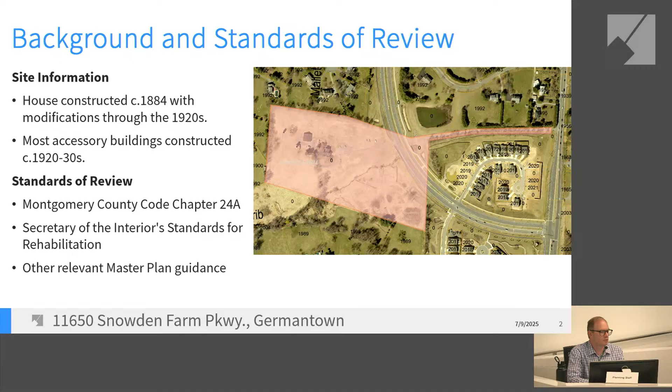Moving on, we will move on to the preliminaries, and our first preliminary tonight is 2A at 11650 Snowden Farm Parkway, Germantown. Is there a staff report? Yes, there is, Madam Chair. This is actually a second preliminary consultation for work to the project. Again, this is the House Farm master plan site. The house was constructed circa 1884 with modifications through the 20s. Most of the agricultural accessory buildings were built between the 20s and the 30s. And we're dealing with the barn that you see in front of you.

Just by way of background, when this was nominated to the master plan, it was identified under 3 criteria as an excellent example of late 19th and early 20th century family farming in the Clarksburg area, for embodying the distinctive characteristics of a high-style Gothic Revival farmhouse, and as an established and familiar feature in the community once dominated by family farms.

So just over a year ago, the HPC held a preliminary consultation to discuss demolishing the existing barn and constructing a new building similar in appearance to the existing barn in its place. The HPC was generally supportive of the concept and supported staff's identified list of materials as required for a HOP, including as-built and existing drawings of the barn, a structural engineer's report documenting the condition of the barn, demolition plans, and material specifications for the new construction.

This is the barn in question. This aerial is a little outdated, as several of these outbuildings have been demolished with the HPC's approval, and the house has a new roof in place. So again, the applicant proposes to demolish the existing barn, which is a historic double-sided corn crib, and use the new barn-like building as assembly space.

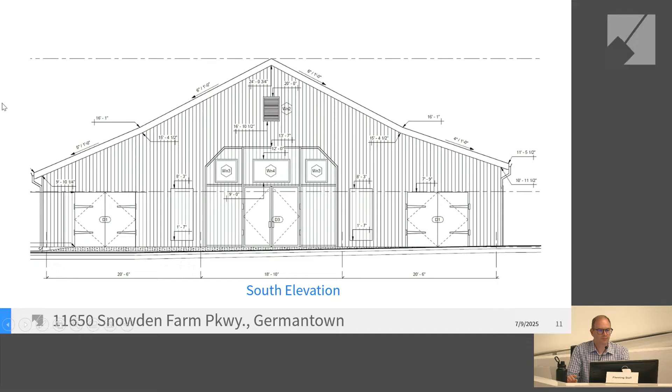So the new building will look similar to the old. It'll have siding that matches. We'll get into details a little bit, but the proposal is to sort of maintain the existing fenestration. There is a slight break in the roof, which isn't as large as the existing break. Again, the fenestration will match on the north, west, and east elevations as well.

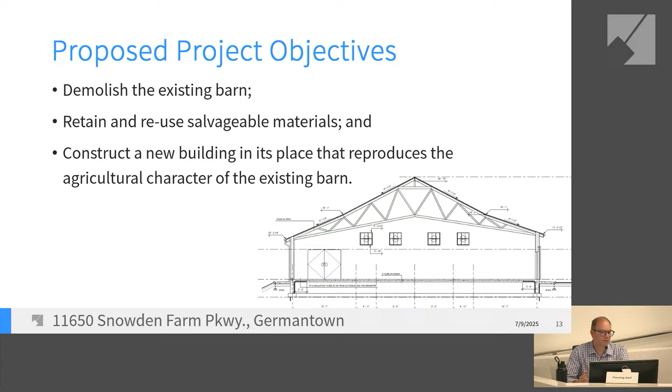So again, the project is to demolish the existing barn, retain and reuse the salvageable materials, and construct a new building in its place that reproduces the agricultural character of the existing barn. With the engineered steel truss, they'll be able to have a large open space as part of the new building.

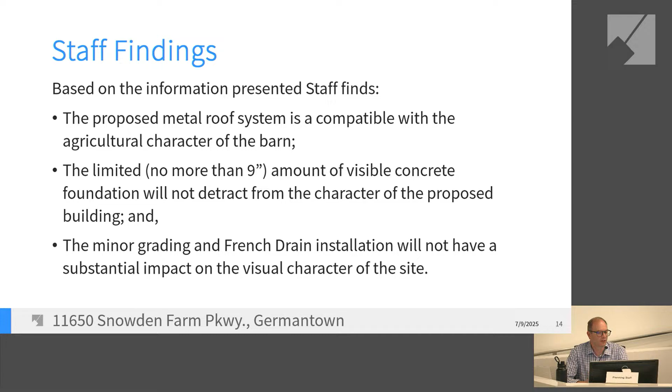So the applicant provided additional information. Staff and the staff report found that the metal roof system proposed is compatible with the agricultural character of the barn, that the amount of visible concrete foundation will not detract from the character of the proposed building, and that the minor grading and French drain installation, whether installed as part of the building construction or later, will not have a substantial impact on the visual character of the site.

The application states that 40 to 50% of the existing framing could be salvaged and reused. However, the information does not identify where that material is being salvaged from or where it will be installed in the new building. One reason we're having this is to solicit information from the commissioners. For example, does the HPC require additional information regarding the salvage materials, and if so, what form should that take? Are notated and proposed drawings sufficient, or is more information required?

The applicant indicated that their barn contractor provided that material estimate, but the only thing we received is the number of the timbers and their sizes, not how they're going to be integrated into the new building. So if materials can be salvaged but not reused, does the HPC find that the applicant must retain them, or are they going to put conditions on a desirable way of disposing them?

So there are a number of outstanding materials that staff finds are required for a HOP. Detailed specifications for the windows and doors. The information we received is that they will be wood made to resemble the originals, but the level of detail is not sufficient to make a determination of appropriateness.

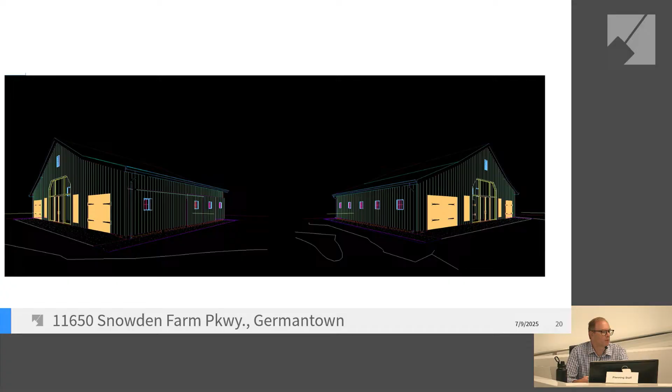And with that, I will answer any questions that you have. Are there any questions for staff? Commissioner Doman? Yes, this is Commissioner Doman.

If the applicant provides you with the information that appears to be lacking at this point, can we as a commission delegate to staff to review the information that's provided and move ahead on this project, or do we have to come back for a hop?

So this was advertised as a prelim, so you can't vote for it like a hop. However, if the HPC's feedback is consistent, we encourage applicants to potentially get started on the engineering portion of their packet, because usually applicants won't do that until after the hop approval. There are steps that they could begin taking, but it would need to come back and we would expect it to be approved by consent based on the feedback of the commissioners.

So no, you can't approve a hop this evening, but you can provide the applicant with your opinions as to the appropriateness of what's proposed and a likely vote at a future meeting.

Okay, and then I just want to state for the record that I did visit the site yesterday, and I did meet with, I guess, the applicant out there, and I was confused about the vestibule. I wasn't sure how that looked and how that presented, so I wanted to take a look at that.

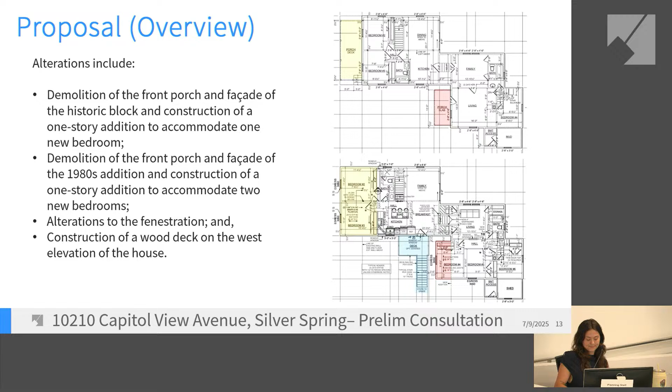So for the first work item, the applicant is proposing to demolish the facade and front porch of the historic house and construct a front gabled 1-story addition that measures 5 feet 6 inches deep and 14 feet wide. The applicant is proposing vinyl siding.

Staff finds this work item to be inappropriate and contravenes 24A-8B, as well as Standards 2, 9, and 10. The 1-story front porch and gable end are character-defining features of the early 20th century bungalow. The removal of the facade would alter the resource beyond recognition and strip it of all its historic character. The historic facade is currently visible from the right-of-way along Capitol View Avenue, and its demolition would negatively affect the streetscape and the district as a whole.

The applicant is also proposing to demolish the 1-story porch and facade on the 1980s addition and construct a new 1-story addition that measures 8 feet deep and 24 feet wide. The proposed siding is also vinyl.

Staff is, in general, supportive of the demolition of the porch and facade on the 1980s addition. There's no historic material that will be removed as part of this alteration per 24A-8 and the standards. However, staff does not support the design of the addition as proposed and finds it to be incompatible with the character of the existing historic house and the district as a whole.

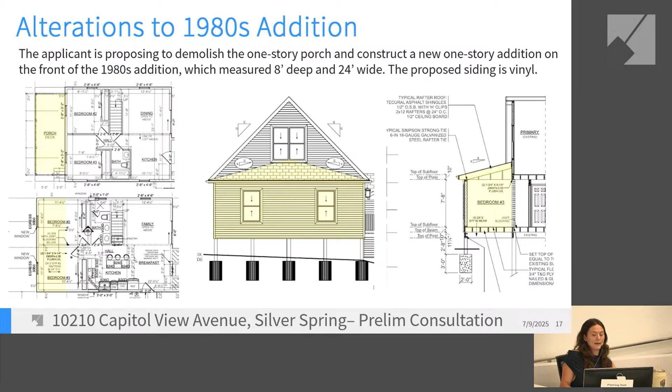The applicant is proposing to construct a new deck on the west elevation of the 1980s addition for access to the proposed new front door. The proposed deck will be constructed with pressure-treated wood and vinyl railings. The front door was previously located on the facade of the historic house, and the applicant is proposing to relocate it to the side of the addition.

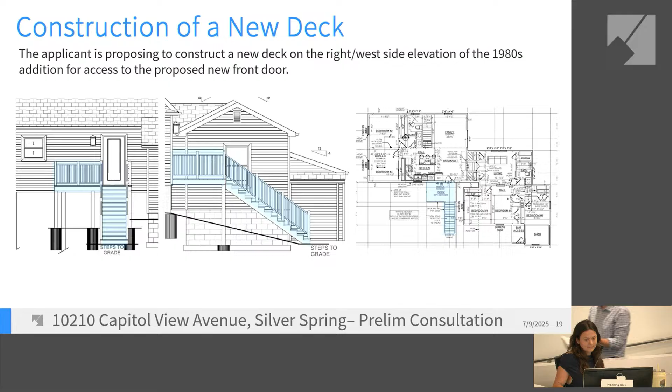Staff finds that the location of the new deck in front of the historic house is not appropriate. The deck would obscure the view of the historic house from the right-of-way along Capitol View Avenue and alter the spatial character of the property, contrary to Standard 9.

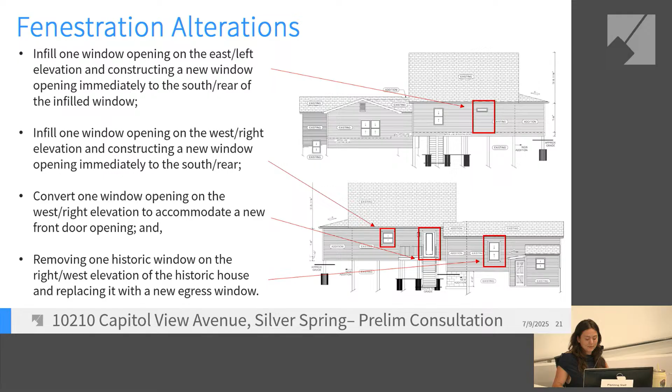The applicant is proposing to alter the fenestration of both the historic house and the addition. Alterations include infilling 1 window opening on the east elevation and constructing a new opening to the south, infilling 1 window opening on the west elevation and constructing a new window opening to the south, converting 1 window opening to a door opening on the west elevation, and removing 1 historic window and replacing it with a new egress window on the west elevation of the historic house. The applicant is proposing vinyl window trim but has not provided any other specifications for the windows.

Staff finds there is not enough information to evaluate the proposed new windows and recommends that the applicant submit specifications for windows and doors in the future. Staff also notes that any historic material should be retained and repaired, or replaced with in-kind materials. Staff notes that vinyl is not an in-kind replacement for wood.

Staff has a few additional concerns with the house that were not addressed in the proposal, including any regrading and hardscaping alterations to accommodate the new front entrance, the treatment of historic fabric in poor condition, and the unusual height of the deck, which appears to be causing issues with the windows and possibly the siding.

Staff requests feedback from the HPC on the following: the overall appropriateness of the proposed demolition of the facade of the historic 1920s house and the new construction; the appropriateness of the fenestration, massing, and overall design of the proposed construction on the facade of the 1980s addition; the appropriateness of the relocation of the front entrance from the historic block to the 1980s addition; the appropriateness of the location of the new deck; and the appropriateness of the proposed materials provided as part of this application.

Staff recommends the applicant make any revisions recommended by the HPC and return for a HAWP or an additional preliminary consultation. Staff also recommends that the applicant submit the following to have a complete application: window, door, and any other material specifications, and a plan for the restoration of deteriorated historic fabric if this is part of the scope.

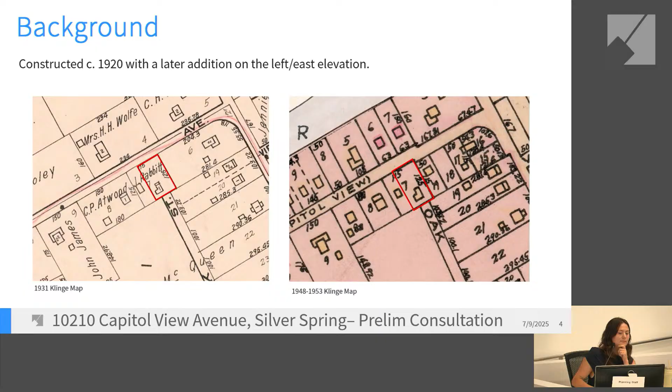Okay, thank you. If there are no more questions, we will let the applicant's agent come forward, and you will have 7 minutes to make the best case you can. Please turn on the mic so the light is green, and then give your name and your relationship to this project. Again, you have 7 minutes—I suggest you explain to us and make a case for this project.

Thank you. My name is Drew Griswold. I'd be one of the project managers on this project. This is my first time here, so I'm a little bit excited, and I can tell you are all very excited as well.

So a couple things. Obviously, the biggest thing we're looking for is just feedback on this. I know the 1980s addition is definitely an interesting one, so we're kind of just looking to see what we're able to do to make this work and make this happen. I know the biggest thing on the 1980s addition is the removal of the deck, so I just wanted to see what we can do and what needs to happen.

That's it? Yes, ma'am. I've got a couple questions before I let everybody else start asking questions. Does the owner understand that there are restrictions on what they can do on this property? Yes. Okay. Do they understand that they may not be allowed to do what they want to do? Yes, and that's kind of what we're in the process of figuring out, what our options are.

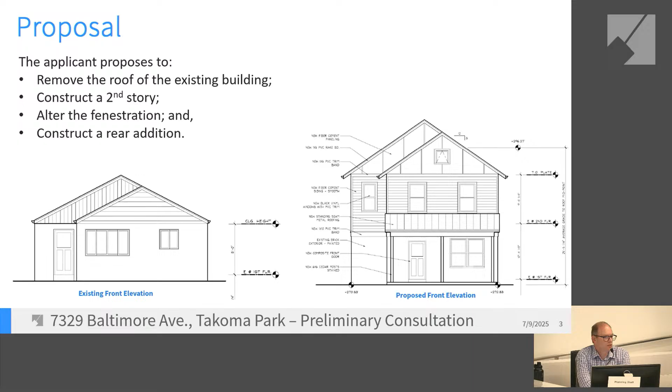So the existing building is a minimal traditional building with metal windows that's in very poor condition. I saw the photos for the listing when it was for sale recently, and I think the owner should be commended for taking on a project that has put a house in very poor shape to use.

There are some interesting site conditions here. To the left of the house there's actually a 40-foot road dedication for a road that will apparently never be built. And on the right, up the hill, is a 1986 infill construction house that does not match the setback of the remainder of the street. So I guess tonight's theme is outlier 1980s construction in historic districts.

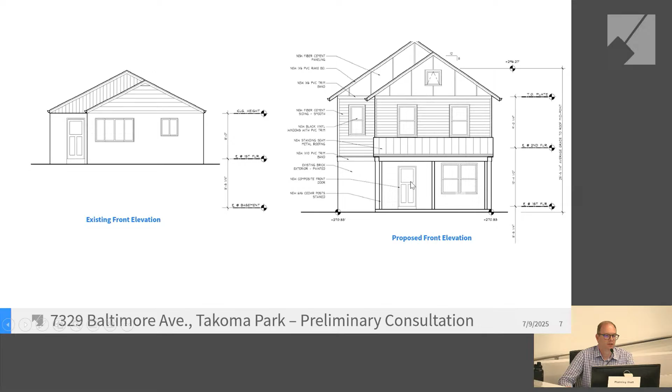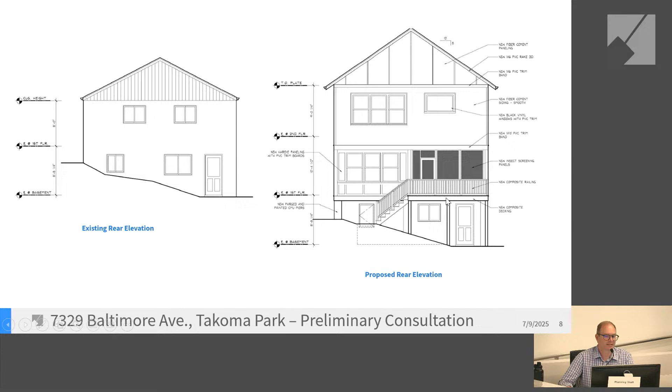Brick house, and the roof is coming off. In the front you see a shed front porch. The second story is going to be sided in fiber cement clapboards. They have vinyl windows, and they're relocating the front door as part of that. In the rear, what you're seeing is all addition. Additionally, the second floor is going on, along with a composite deck off the rear, and the engaged screened-in porch.

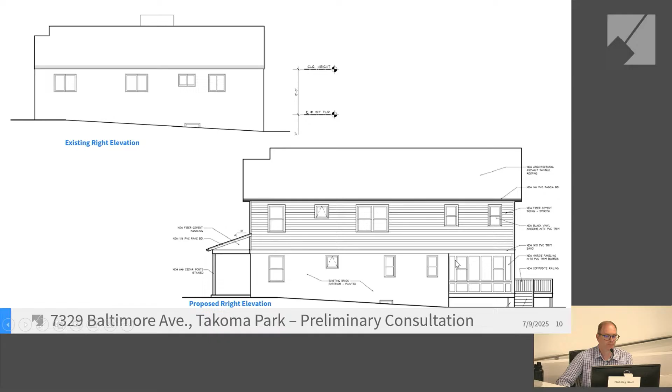Staff has some questions about the treatment of the transition between the brick and the fiber cement, and wood panels. Staff finds that the design guidelines support whole house demolition, so a partial demolition of the proposed house should be approved as a matter of course.

Staff finds constructing a second story with a new front gable roof will not negatively impact the character of the district as a whole, which is the standard established in the Takoma Park design guidelines for non-contributing resources.

Again, the property to the right is higher in grade and further set back from the subject property. Additionally, it has a side gable roof, so the full 2.5-story height is represented hard up against the gable end. And there's a 40-foot road dedication to the left of the subject property that will not be built on, so there is a substantial separation between the subject property and the house to the left.

Staff finds that the proposed materials identified at the time of submission were generally compatible under the design guidelines, and that the proposed rear addition will only be partially visible from the public right-of-way and will not substantially impact the visible size or mass when viewed from the public right-of-way. Staff does request more information regarding the transition between the house's painted brick and the addition's fiber cement siding on the right elevation.

There's a discrepancy between the floor plan and the rear elevation, so we'd like confirmation of that actual window. And confirmation of the treatment of the fiber cement siding in the rear of the second floor, which was not shown on the drawings.

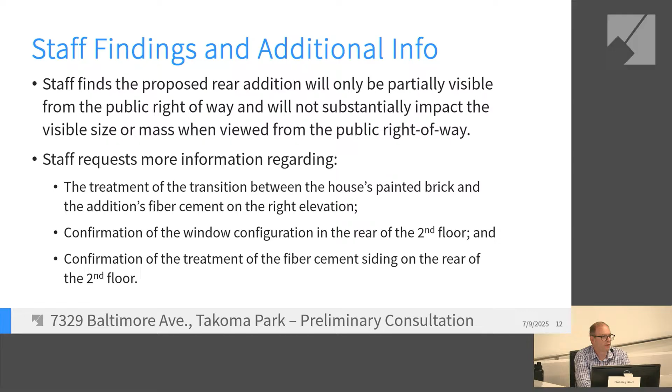Staff finds that the proposed front porch helps to break up the house massing, and that the proposed rear deck will not be highly visible from the public right-of-way. As a non-contributing resource, the options are wide for what the applicant can install based on the HPC's adopted porch policy.

The identification for the material in the back is composite. We'd like a material specification as part of the complete HAWP, but just about any material will be acceptable under the HPC's adopted policy. Staff finds that the fenestration alterations are compatible with the design guidelines, as those treatments will not impact the size or mass of the building. But we do have more questions about the treatment of the existing front door opening, which will be blocked in, the treatment of the right side brick wall to accommodate the proposed window layout, and more information regarding the treatment of the area around the proposed left side entrance.

It looks like in one of the floor plans there is a partial retaining wall that's going to be installed. There will be some regrading, but we don't have the full extent of that or the design and materials associated with it. After publication of the staff report, the applicant provided material specifications for windows, doors, the rear deck railing, roof shingles, gutters, and porch columns.

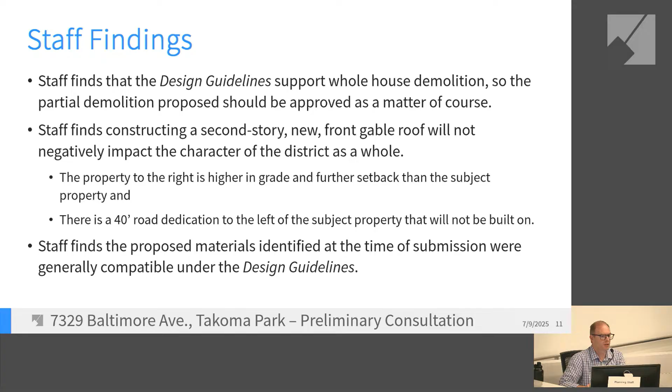I would assume that you're going to ask for one, is that - well, the question is actually posed to the HPC. So again, the site does have some unique conditions, including the road dedication on this side, and recognizing that this is a 1980s infill construction that is not contributing to the character of the district. So whether or not those two factors negate the need for a streetscape study is one of the things we're throwing to the commission to determine. I have not driven by it, and obviously I could answer my own question if I took the time to drive down and look at it, but I would like to see one eventually.

Any other questions for staff? Commissioner Galway: I noticed on the plans that they were suggesting painting, and I'm guessing being a non-contributing home, staff found that to be an appropriate treatment. Yeah, as much as we don't like to see brick painted, for a variety of reasons, under the design guidelines for a non-contributing resource, we found that that was an acceptable treatment and would recommend approval as part of a HAWP.

Commissioner Radu: One question about this 40-foot street dedication - it's hard to tell from just the aerial with the parcels that was in the staff report. How much buffer will remain - I mean, yes, this probably will never happen, but if it were to happen, how close will the road be to the house? I don't have an exact measurement for that, but it will need to maintain the setbacks required under the zoning ordinance when the building was constructed. So from the lot line, my understanding is there will need to be a setback in addition to the 40-foot road dedication, but that's a question best posed to the applicant.

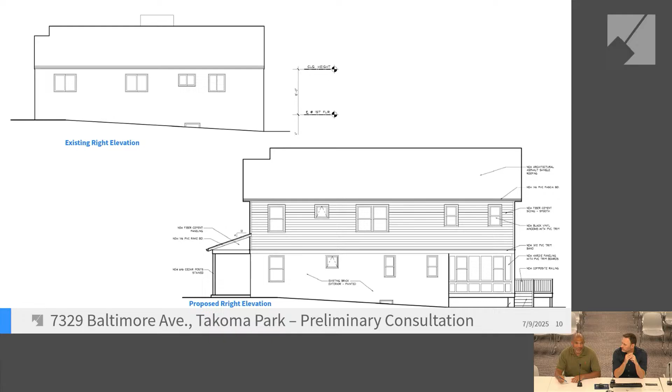Good evening again. I just wanted to address a couple comments there. The 40-foot paper street - I've had counsel reach out to DDOT. There's no intent to ever build on the road. Unfortunately, we will have to go through the full subdivision and condemnation process, and that may happen in the future, but the upside is it's gonna cost me roughly 25 grand to go through the process with legal and survey fees, and then I'll have to pay property taxes because it would get split between my property and the neighbor's property. So I'm not sure if that's going to happen soon. It's just a pretty significant financial blow to do that.

I heard the request for a streetscape study, and I was hopeful that this application could be approved without it. It's pretty simple if you drop by it. There's this existing 1-story house. To the right of it, with a substantial grade change, is another non-contributing structure, which is going to be significantly higher than this house once it is constructed. To the left, there is the 40-foot streetscape plus a side yard that separates us from the house that would be contributing on the left. As far as I know, there was a question about a window that differed from the elevation in the rear.

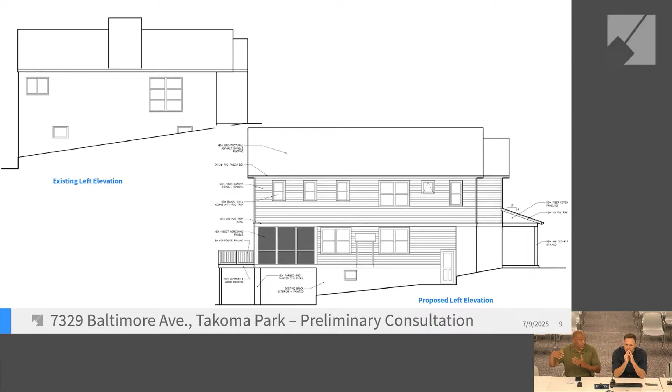As far as getting access to that side door, I don't want to do a bunch of impervious stuff, so we're probably going to do pavers or steppers rather than a concrete sidewalk.

It's going to be pavers and steppers to get to that side entrance. And I think that answers most of the questions that the staff had. My hope would be that if we've addressed the major critical issues, the board would be able to approve it, leaving some of the smaller details for staff purview that don't justify your time to review. That's all I have.

We'll have questions for you, but before we start, I happen to know this house. I don't live far away. When I used to walk to the Takoma Park Metro, I'd walk down your street because it's nicer than Takoma Avenue. So I'm familiar with this house, even from the previous owner when he used to sit out in his front yard.

But this house, you mentioned the house to the right is up much higher. But also the house to the left sets up a little higher too, doesn't it? It's two stories, higher than it currently is. I think they'll be around the same height once we add the second floor.